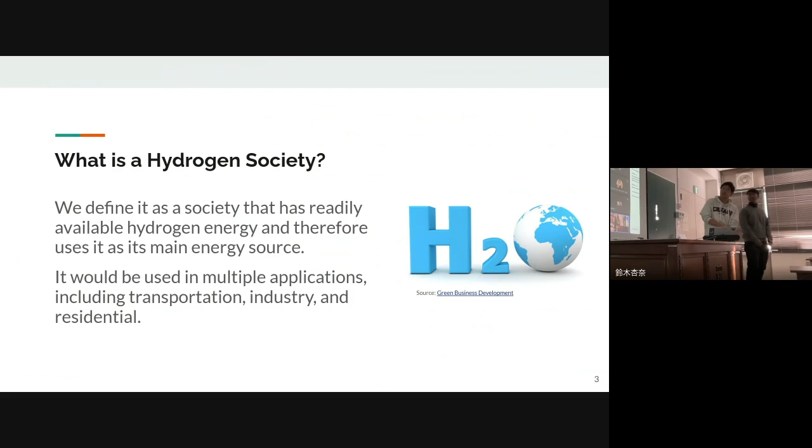So I'll explain our definition of hydrogen society. We define it as a society that has readily available hydrogen energy and therefore uses it as its main energy source. Also, it could be used in multiple applications, including transportation, industry, and residential.

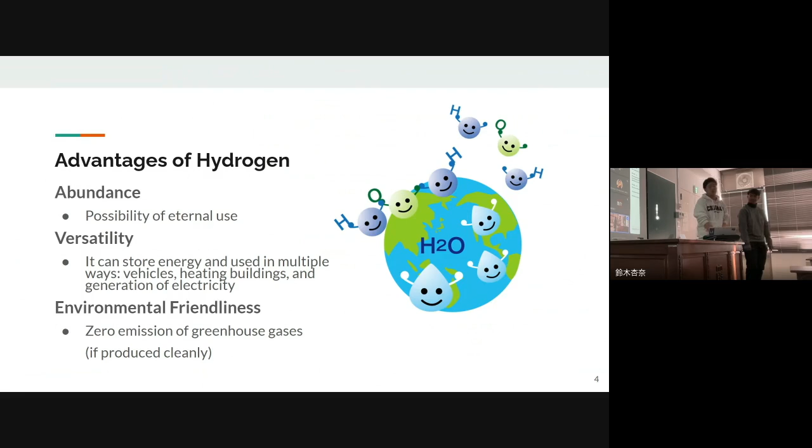So I want to go over the advantages of hydrogen in this slide. First is abundance—we can use hydrogen for a long period. The second is versatility: hydrogen can store energy and be used in multiple ways—vehicles, heating buildings, and generation of electricity. The last one is environmental friendliness: zero emission of greenhouse gases if produced cleanly. So as you can see, there are many advantages of hydrogen.

However, there are some issues with hydrogen energy as well. First is social-systemic challenges—we have to address safety concerns, public acceptance, and global cooperation. Second is technological challenges—we need to improve efficiency, lower costs, and scalability, and think about how to store and transport it. So in this presentation, we focus on the storage challenges.

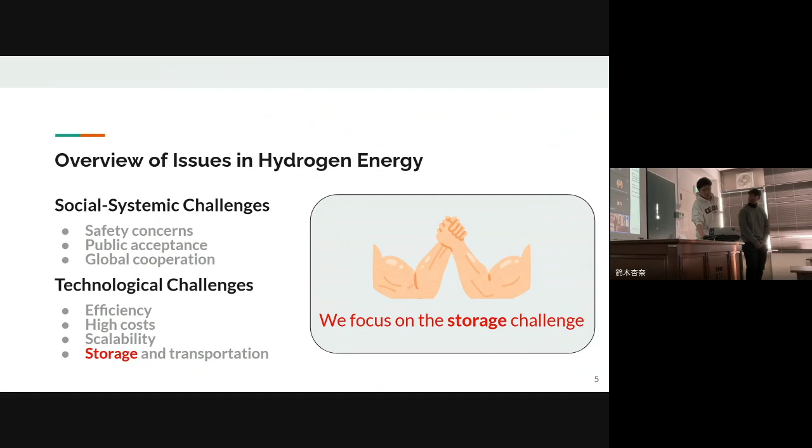One of the challenges we think about is the size of the hydrogen tank. As you can see, there was a small tank at Denso, but to realize a hydrogen society, we need huge tanks in the Tohoku region.

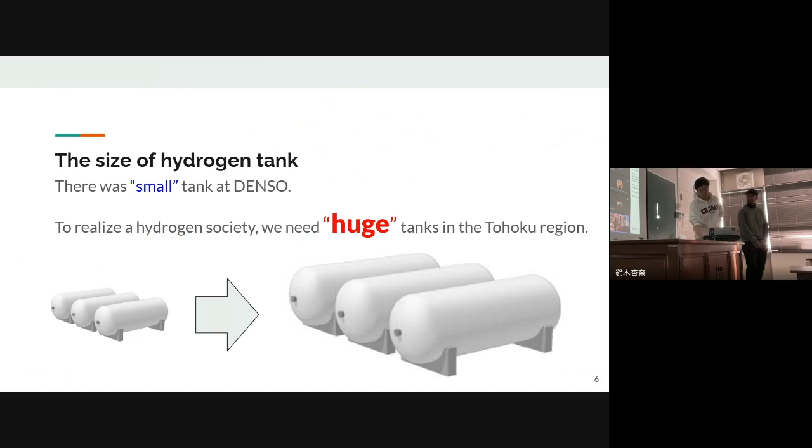I want to explain the current storage method. For now, they store hydrogen as liquid or gaseous, and those methods are utilized in hydrogen stations or the aero industry. The average size of the tank is around 100 cubic meters. So this is the current storage situation.

To realize the hydrogen society, we need to make it much bigger. So then we need to consider the location and cost of the tank, and the risk when an earthquake occurs.

Just to touch more on this, we can think of an example of a tank that we all saw, or some of us saw, at Denso. They had two tanks, and each one was 19.6 tons. But that's actually just the total weight—most of the weight was the actual tank. If you look at the weight of the hydrogen itself, it was only around 25 kilograms.

As you know, Japan has a goal of using hydrogen and having a hydrogen society. In 2050, guess how much hydrogen they want to make and use. So since the tank has 25 kilograms, guess how much—they need to make 20 million tons.

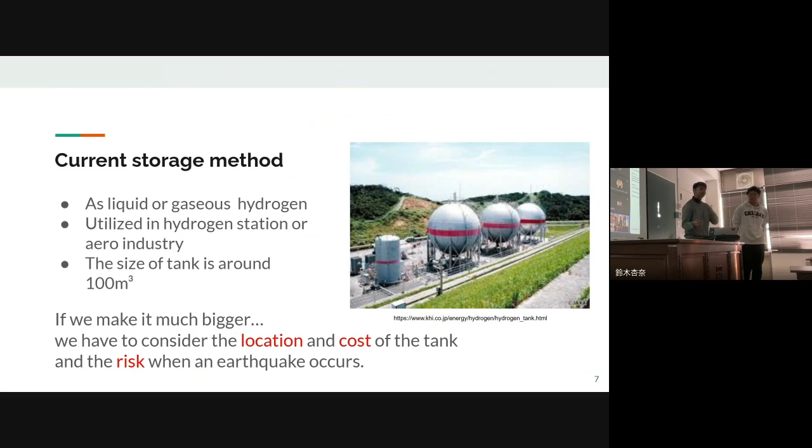That's kind of crazy, because if Denso only had 25 kilograms, how are we going to make 20 million tons? That's what we have to tackle now, since all the other groups talked about utilization and transport, we felt like this would be a fitting topic to talk about.

So these are our proposed solutions. We propose that the country as a whole, public and private sectors, do research and really consider underground and undersea hydrogen storage.

Underground hydrogen storage is not a completely new thing—it's been done for 10 to 20 years. It's called UHS. UHS is a way to store hydrogen gas in already existing places in the earth, like gas reservoirs where it used to have natural gas, or salt caverns, where they dissolve the salt in the caverns, getting rid of it, leaving a huge place where you can store gas.

This allows for large scale storage of hydrogen, which, as you can imagine, building thousands of those Denso tanks sounds insane to me. So we need to think of some other way.

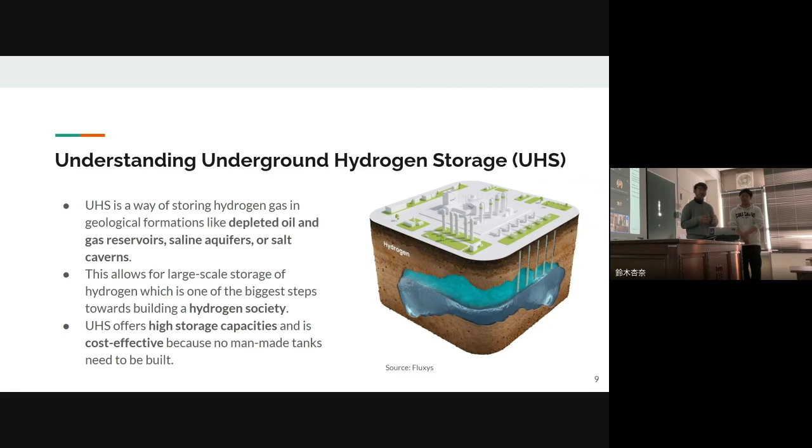And I think this is a really good way. It offers high storage capacities, as well as being cost effective because you don't actually have to make the tanks and use this metal. Just to give some numbers, this has been used around Europe, with capacity of about 2,000 to 6,000 tons. I think there's one in France, about 6,200 tons of hydrogen, which compared to 25 kilograms is a bit better, right?

To implement this in the Tohoku region, we have 4 steps. First is geological assessment—we have to make comprehensive field studies, like surveys, and find suitable places to store this hydrogen in the Tohoku region.

So actually, there was a paper that studied UHS in Japan, but they only explored the Niigata prefecture, and they found a lot of good candidates for that. So I propose that since we're in the Tohoku region, and since we have such a good university with good research facilities, maybe some researchers at Tohoku University can do some field studies in this area as well.

Also, after that, we need to have collaborative planning. This includes government agencies like the Ministry of Economy, Trade, and Industry, industry companies like Tohoku Denryoku, and research institutions like this university. After that, we need to focus on actually making the infrastructure. So, like I said, for salt caverns, this means injecting the caverns with water and dissolving it. There are also other places like gas caverns, which is just looking for places where gas was stored before.

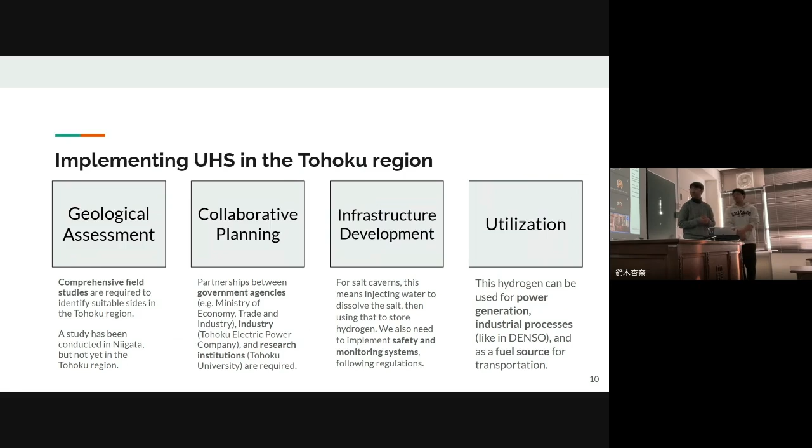And then we need to make sure that this hydrogen is well kept, because if you think about storing it in tanks, there's this thing called embrittlement, which a lot of you have mentioned. In caverns, there are other things that can make it not so nice. For example, there can be some bacteria or microbe life form which consumes the hydrogen. So we need to think about that as well. After that is the utilization. This hydrogen can be used in many ways, like you've mentioned before, such as fuel source, power generation, or industrial processes.

Of course, there are challenges. There's the social concern, like possible explosions because of the hydrogen and water contamination. I think, as all of you may know, this is not really that big of a risk compared to some other things. So we need to educate the public. In one of your presentations, the Japanese public thought that hydrogen is more dangerous than gene therapy, which is insane to me, but okay. So we need to educate the public.

We also need to think about safety during earthquakes. This can be resolved the way that Denso does it, which is using seismic detectors and also safety valves and switches. We also have to worry about the cost of monitoring, inspection, and repair. Obviously it's going to cost some money to invest in this, but the Japanese government invested 1.6 trillion yen, so they have the money to do this. They just need to put their focus into it.

And also there's the suitability. This suitability we don't know yet because there's no research, but even if there are no suitable salt caverns, we can also consider cap rock, which is another sort of underground formation that we can consider.

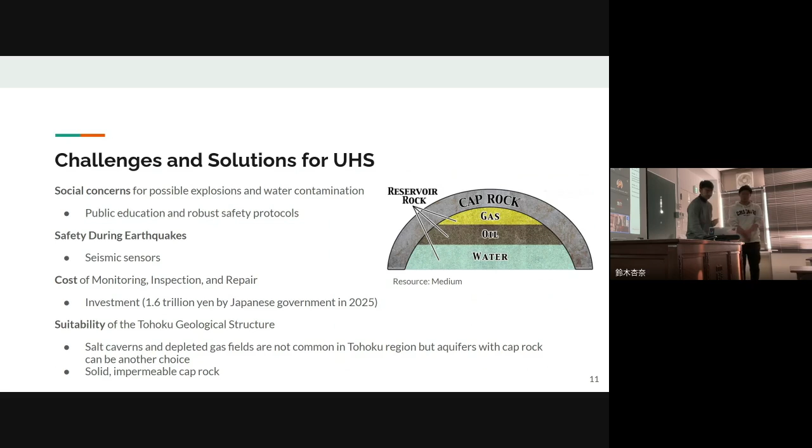Now, the second solution I want to talk about is undersea hydrogen storage. This is a more far-fetched idea because not a lot of people are talking about it or implementing it now, since it's such a new thing. But it is being researched in Aberdeen in Scotland. Their government put 150,000 pounds into this. So this is something for storing. To put it in a nutshell, you take the tanks and you put them under the sea.

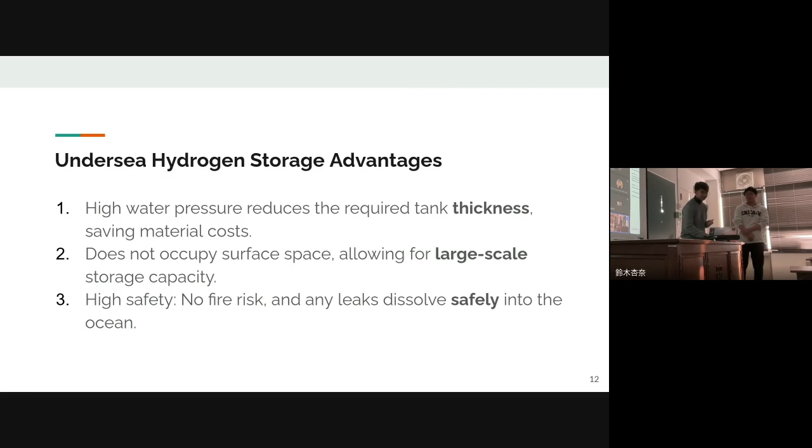What this allows you to do is, since the ocean has higher pressure, you can have thinner walls. You can also save space, because a lot of the struggles that Denso talked about involved taking up a lot of space. And if you're talking about huge tanks, putting them in the sea where people don't live is a good choice. Also, there's high safety because there won't be any buildings crashing down during an earthquake. It's just water. And even if it leaks, it'll just dissolve into the water. So that's not too bad. There's hydrogen in water, so it's okay.

Yes, there are challenges to this, of course, since it's so new. It's going to cost a lot to have pipes, as you can imagine. Also, doing maintenance is really difficult, although it is difficult in general to maintain tanks. I think Denso said that they check their tanks three times a day, which is a lot. So doing that in the sea is challenging. Also, this might disrupt marine ecosystems because we don't know how this affects the fish and other life forms there.

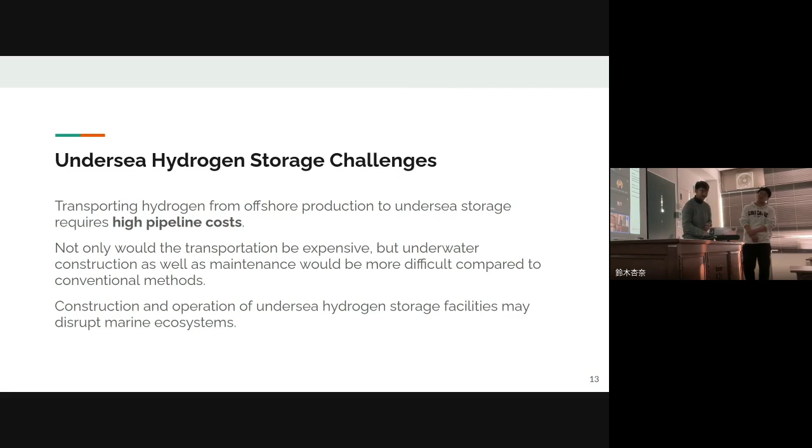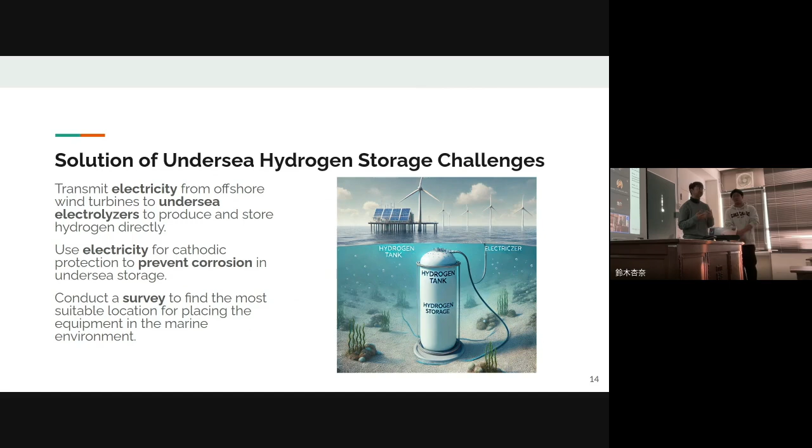To respond to these challenges, we can do all of the work in or above the ocean as well, like having floating turbines and producing the energy there, and just transporting the electricity. Also, you can use the electricity for cathodic protection, which tries to reduce corrosion. And regarding the marine environment, the impact can be made safer with proper surveys by a marine biologist.

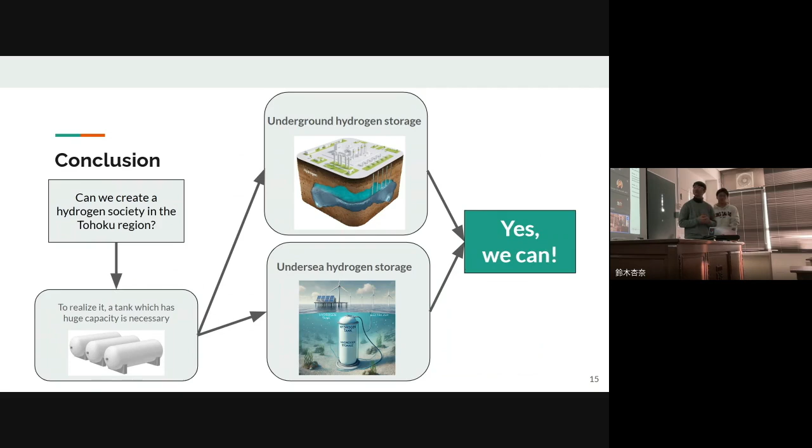So in conclusion, we need bigger capacity for hydrogen, and to do this, we propose underground and undersea storage. So to answer the question, can we create a hydrogen society in the Tohoku region? I say, yes, we can. Okay. Thanks for listening.